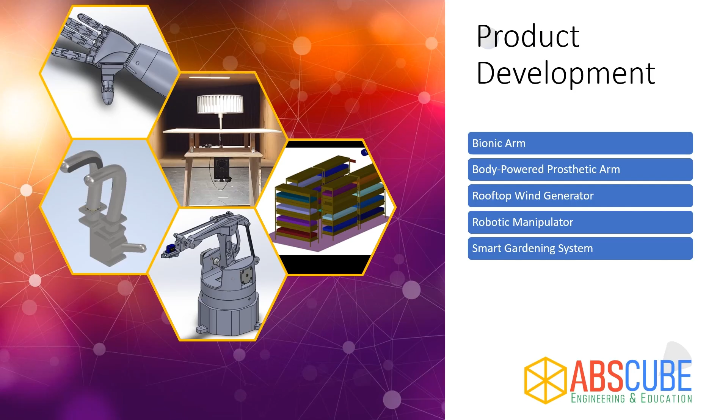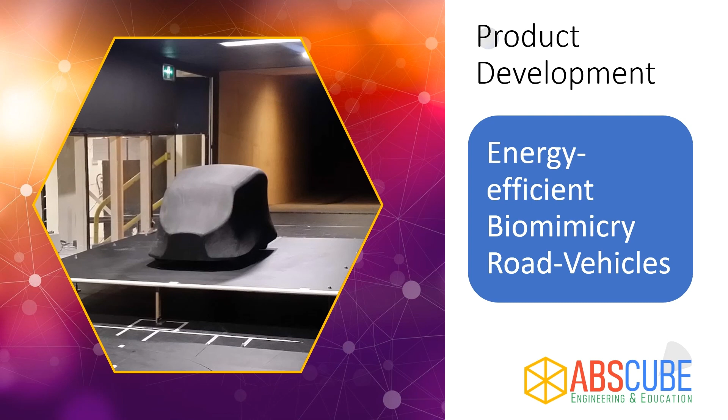Finally, the energy efficient biomimicry road vehicle. Today I'm going to talk about this energy efficient biomimicry road vehicle, a product we are currently developing in progress in our company.

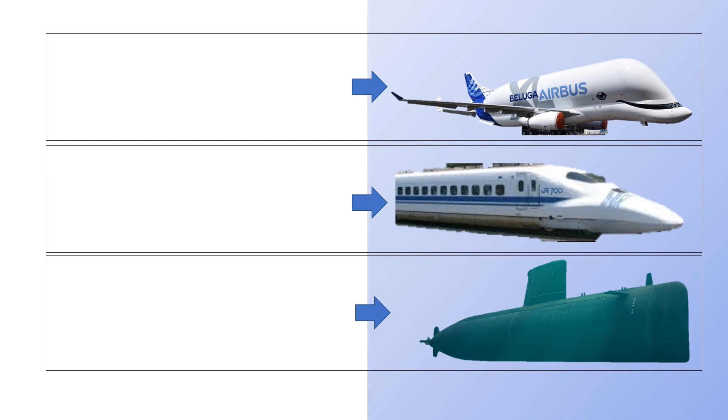Now, what is biomimicry? Here you can see some engineering vehicles: one is an aeroplane, one is a train, and the last one is a submarine, an underwater vehicle. You can see the shape of the airbus was inspired by an animal, the dolphin. Also the beak of the kingfisher is the inspiration for this high-speed bullet train, and the whale is the inspiration for this submarine. You can see the similarities of this engineering design with the design of nature.

So when we copy these things from nature to design engineering applications, that is called mimicking, or biomimicry, in engineering design.

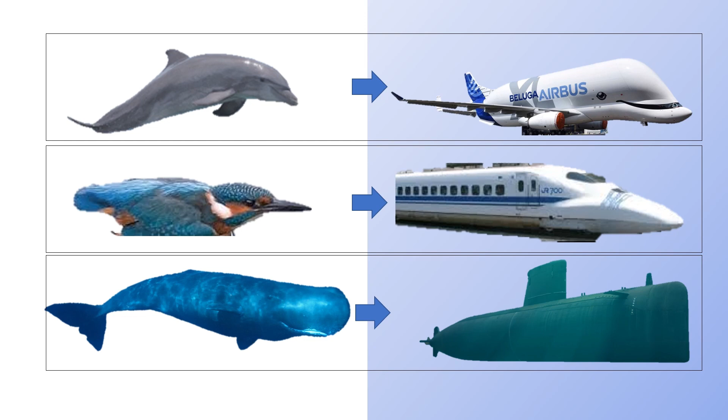Now, what is the methodology? First of all, we need to determine our design objectives. That means what type of design we are going to implement, for example car, bus, or any other objective, any other engineering application.

Once we know our objectives, selection of a suitable biological species, where we need, similar to the previous examples, like a dolphin or any other species like whale. So we need to find out what matches our design objective.

Once we get our inspiration, the biological species, we are going to select that species for detailed study for the parameters. We need to identify what parameters we can implement in our conceptual design.

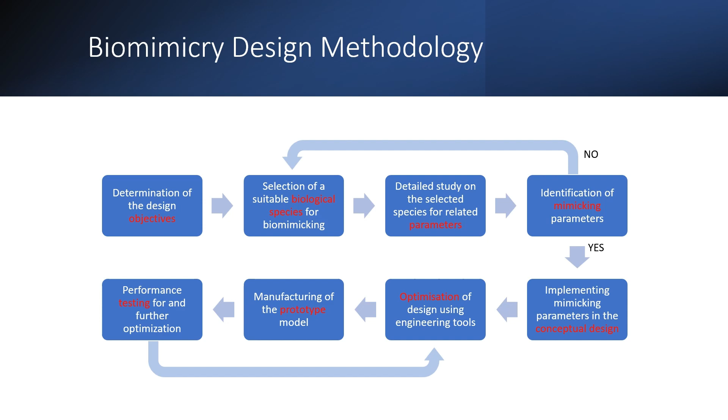Now for this study, the design objective is to design energy efficient road vehicles. There are several types of road vehicles we have selected for this study. We are designing a passenger car and a light truck, biomimicry light truck and biomimicry design for a passenger car.

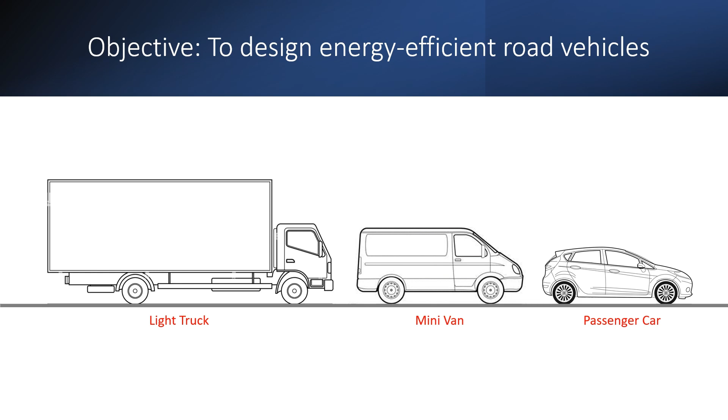Before we go for the biomimicry design, we just need to look back at the evolution of passenger car design. So these are the basic car designs. Initially, when the passenger car was introduced to human civilization in the 1880s.

The second Marcus car, its basic mechanisms are there. There is no aerodynamic fairing, nothing is there. As time passes by, the 1920s model has a shade and a fairing. Then in the 1960s, a more aerodynamic car comes into play, like the Toyota Corolla model.

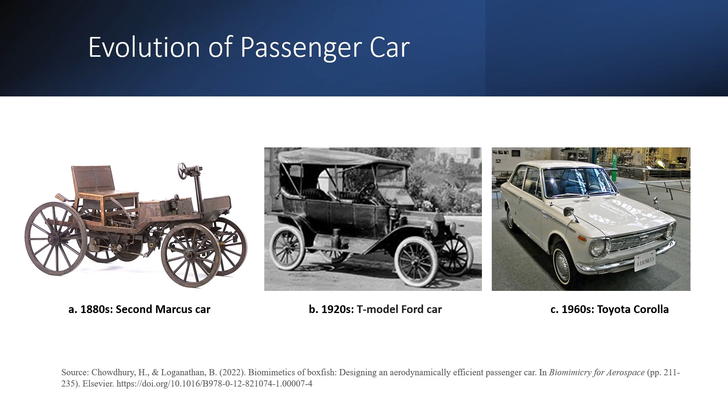We know our objective. Now we are going to select a suitable biomimicry biological species for our biomimicking project. Our objective is to make a passenger car, and we just need to investigate some of the species anywhere in the world and look at the features.

We found that the yellow spotted boxfish is a very suitable biological species for car design, because it has box type shapes and also curvatures, and all other features are really promising for designing a low drag, energy efficient biomimicry car.

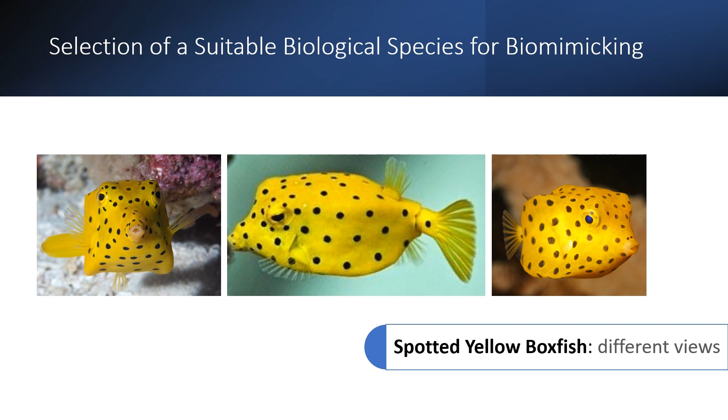Now in this slide, a little bit of a swimming video of a boxfish. Here you can see the size of the fish is very tiny, but you can see in this video clip the different orientation and movement, and how it is moving along and swimming underwater, the features and all other things.

This is a really good selection for designing our passenger car. Now we know our species, and we know what our objective design is, the passenger car. For the conventional design, we are going to redesign the features of the conventional car to make our biological design.

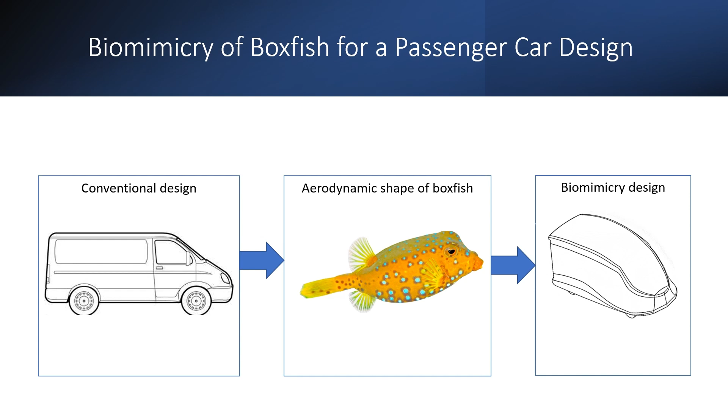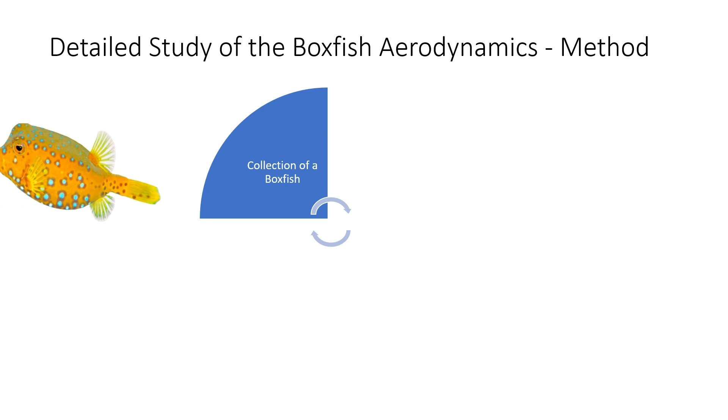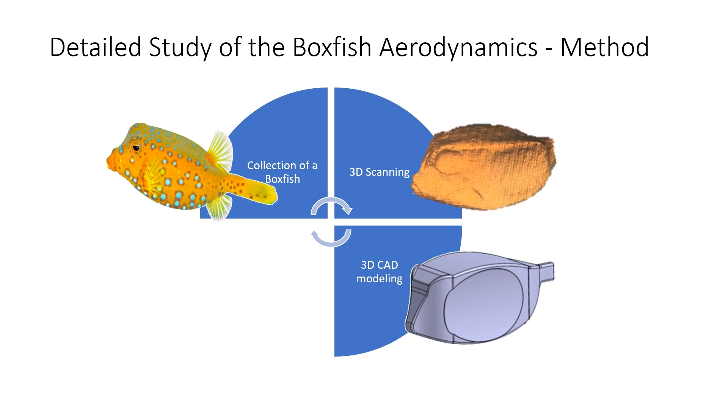Now in this slide, I'm going to show you the methodology applied for this study. First of all, we collected a sample of a live boxfish, then we 3D scanned it to get the exact features, took all the measurements, and made a 3D model of this boxfish for further study.

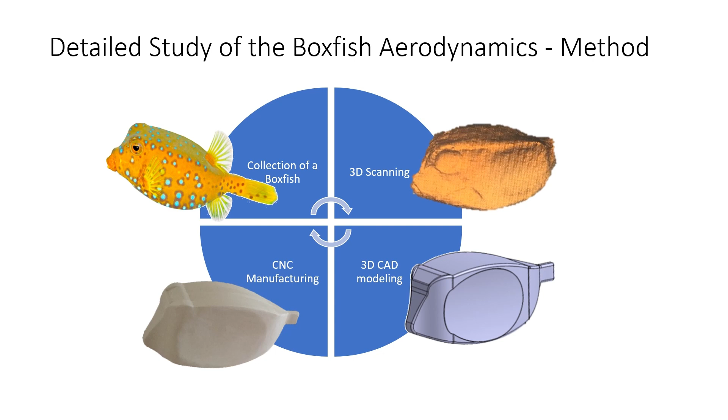Then through CNC manufacturing, we created a quarter model boxfish shape for study. For this study, initially we developed a shaped model, and you can see some of the study related materials.

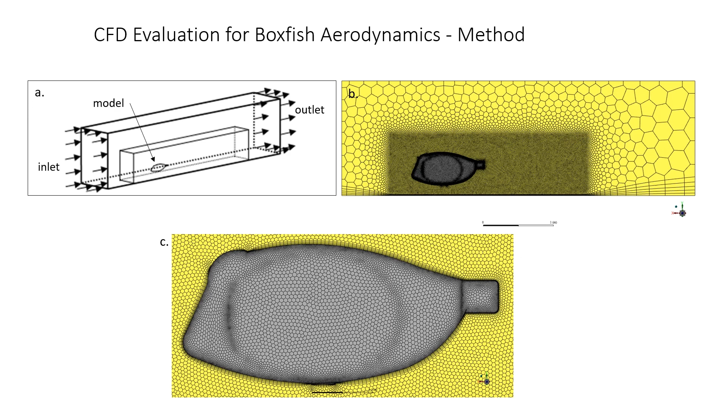We took a mesh, and then we created a model wind tunnel, and we evaluated the performance, drag, and features of this, and you can see some of the evaluation.

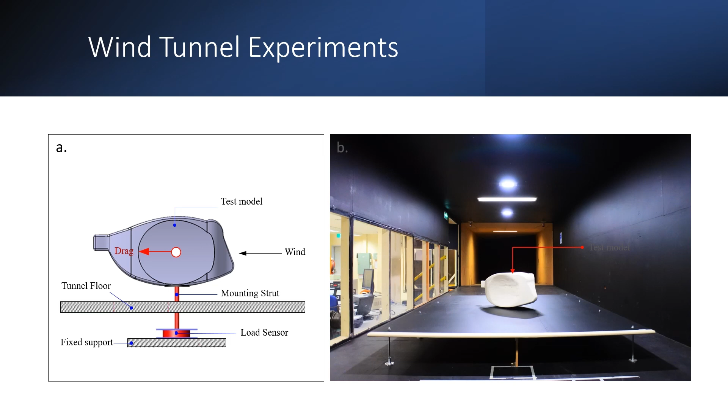The wind tunnel experiment: in this experiment, we used a load sensor to measure the exact amount of drag and lift and all other forces in the wind tunnel. You can see the wind tunnel test section, a type of wind tunnel so we can test a full car inside this wind tunnel.

In this wind tunnel, some of my students were doing this testing at that time. So this is the outside, and now this is the boxfish model.

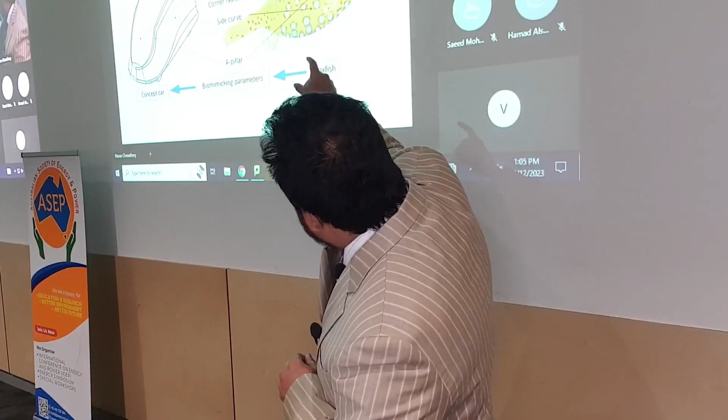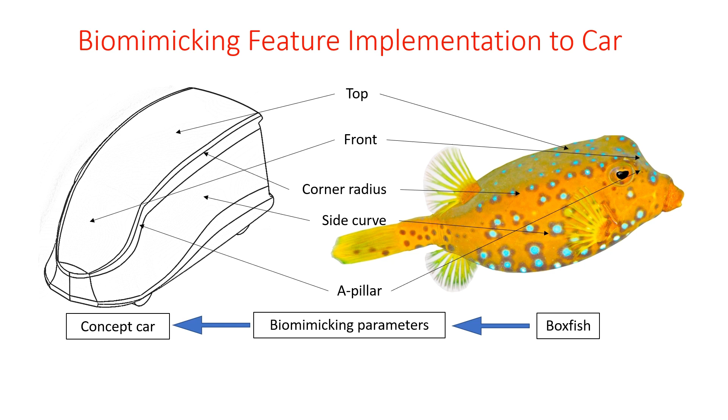From this box fish, this was our inspiration. We take that model and these are the features we use. We're not taking the tail, because if we put a tail in a car, it will be like a funny thing. We saw that the tail has very good advantage, but we cannot put a tail in a car. So this is our inspiration, where we have applied our modeling.

So this is the car we came up with, the iteration, with modeling and all those things. It is not that with a click of a button AI will generate these things. We are human AI, human intelligence was applied to these things. This is the creativity of a human being.

So this is our model, and we developed this model car, and then we go for the optimization. It is not the final version. We optimize these things. This is still a virtual world.

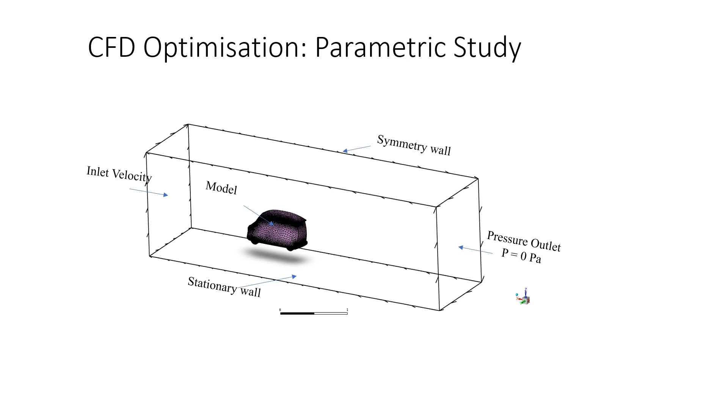And this one, we test it, and if it is not okay, what do we do? We just crash it and throw it and do it again. How many times, you can ask? Maybe hundreds, more than 100 times we have done these things. So it is a time-consuming thing.

And once we've done that, we have to stop somewhere. We just compare, and then okay, stop. We are running out of time, so we go for the next stage.

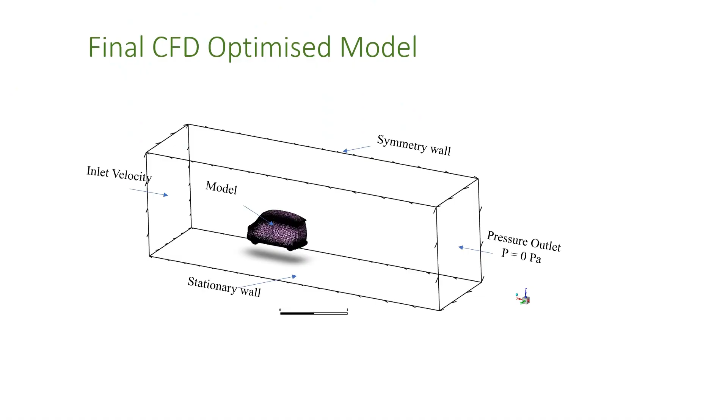So the next stage is fabrication, and this fabrication process is going on here at RMIT, and it is teamwork. It is not that Dr. Harun has done everything, because I run a team, and this team, we work together. This video was created with the RMIT media cell. This is a very slow connection, that's why it's not showing everything nicely, but it's available online.

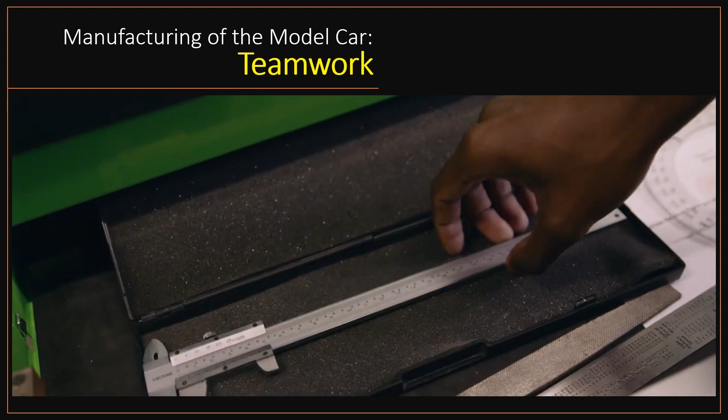So this is teamwork, and we build up our team to make this kind of small model, which even requires a lot of devotion from the students. And that's why I want to inspire the students, because the fish inspired us, and I want to inspire the students so that in the future they can go on with their innovation.

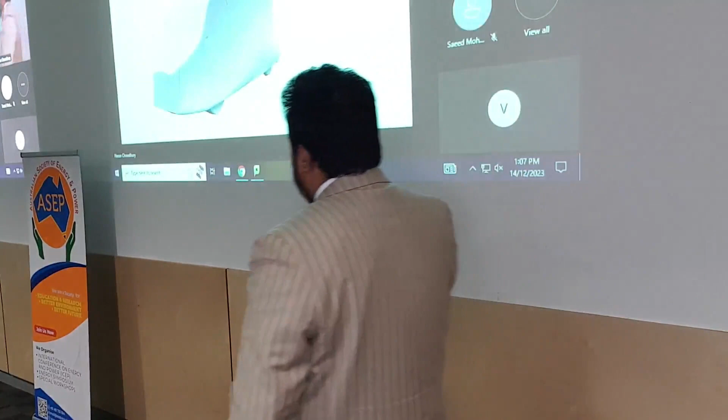Now this is our constructed model, and then after that we painted it. You can see this is the wind tunnel test section, and we are doing the real test. This is a quarter model, so if we multiply it, it's a quarter model, that means it's not that small a size.

We also compared it with our Holden project beforehand. Professor Firoz Alam was doing some tests, and Professor Simon Watkins was doing this kind of research, and we're still using that model, which costs like $50,000, more than a car. This model we use is a detailed model, so we use it for comparison, to see how it compares to our model.

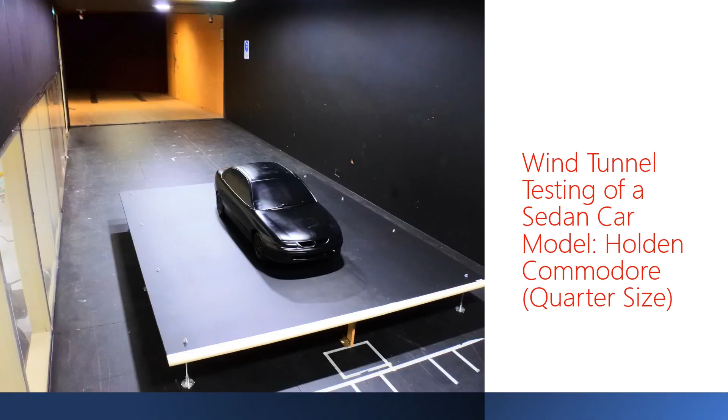So we compared both models, and on top of that, we also modeled a sedan, a hatchback, and a minivan, along with our biomimicry model. The fourth one is our model, and we compared it with these others in a safety comparison as well.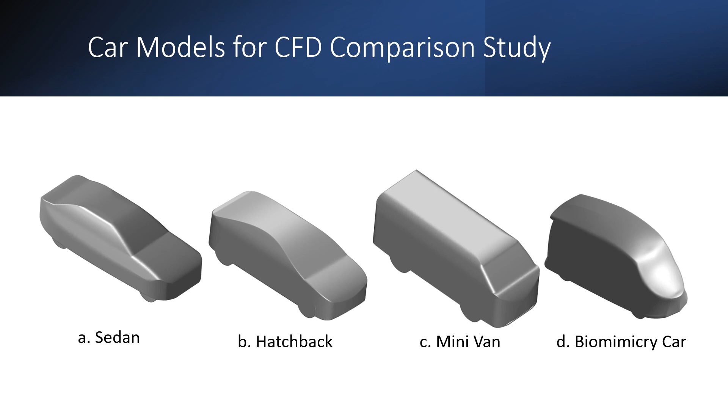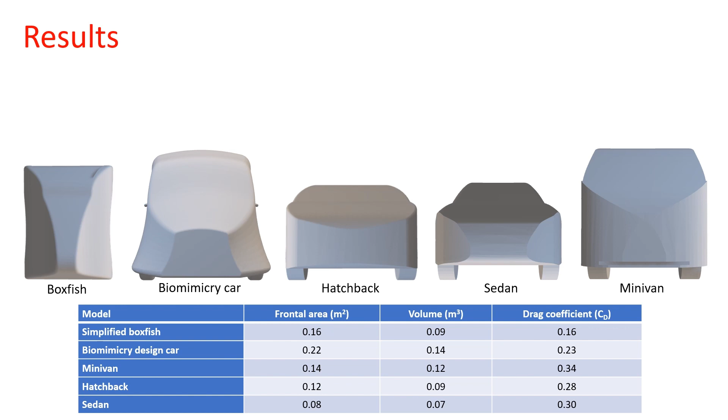So look at that, how does it compare? This is the CFD work, you can see some of it, and without going into detail on the results, I'm going to show you the final version. So what is that? The box fish with the tail gives us a significantly low drag coefficient. Look at that, 0.16.

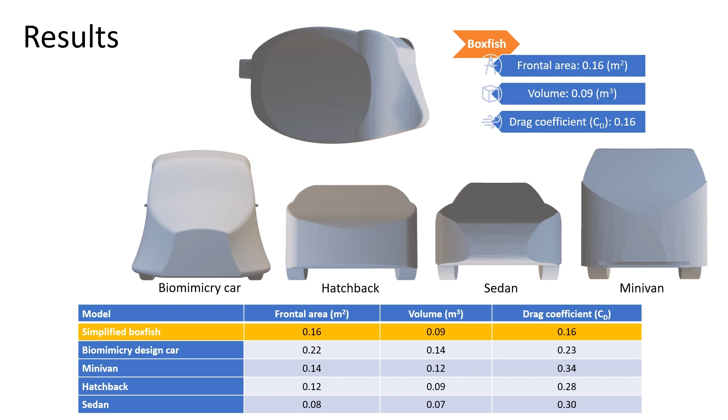Because it has the tail feature, and if we go for the hatchback, this hatchback model has 0.28. So this is compared to that, a little significantly higher.

So this is another model test we've done for comparison, like a sedan, and this sedan one is similar to a Holden Commodore. And this one is a minivan, it's a Toyota model.

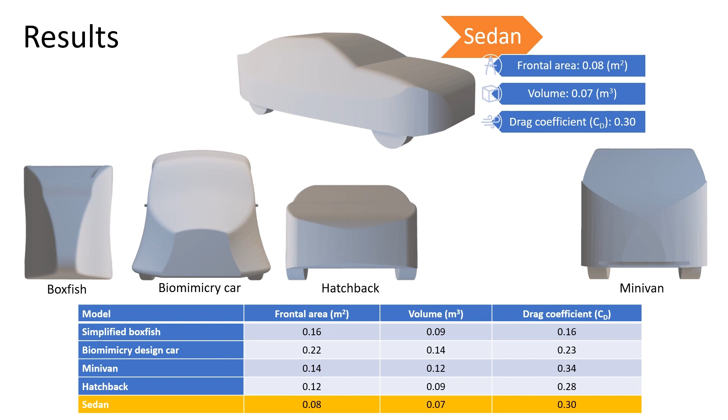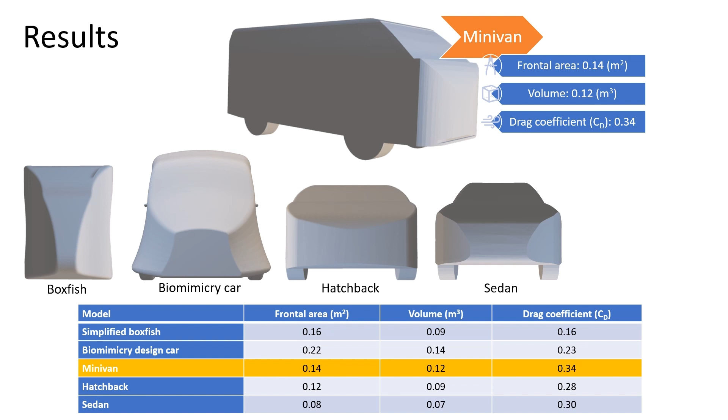So this one, although it is bigger, looks like a box. Go through this one. With this model you can see the frontal area. So we have a few more data, volume, because we are going to compare model to model. So how is it comparing the volume element? You can see the largest volume is for this model, and then this one is 0.14, double the volume of the sedan, and it has 0.23.

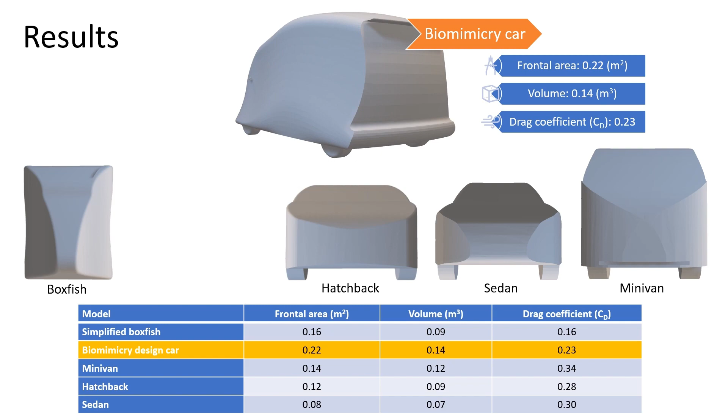So this is because of the feature of the boxfish. So naturally it is coming up. So with this model we are actually happy, and then we applied this to another design, a light truck. This light truck is conventionally designed like that, the conventional design, and we have a model at RMIT University.

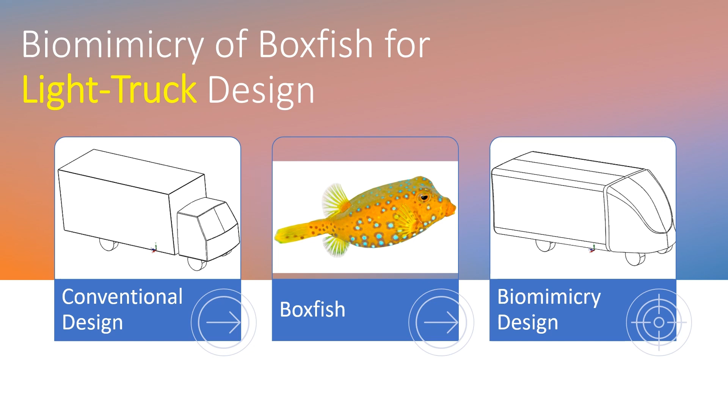And with biomimicry, we came up with this using the principle of biomimicry. You can see the front shape. We changed this to make it more streamlined. So this design goes through the same principles. I'm not going to explain all those results, but you can see some of them here. And this is the model inside the wind tunnel.

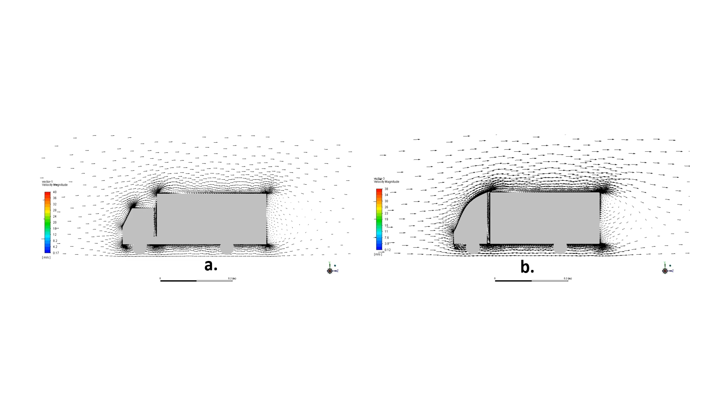What we have come up with is a reduction of the drag: the conventional design has 0.6 drag, whereas our biomimicry design has 0.4. So this is a 30% reduction. Just think about it: drag is fuel. So it's a fuel saving. If you can save this much fuel, it will be a significant achievement for us.

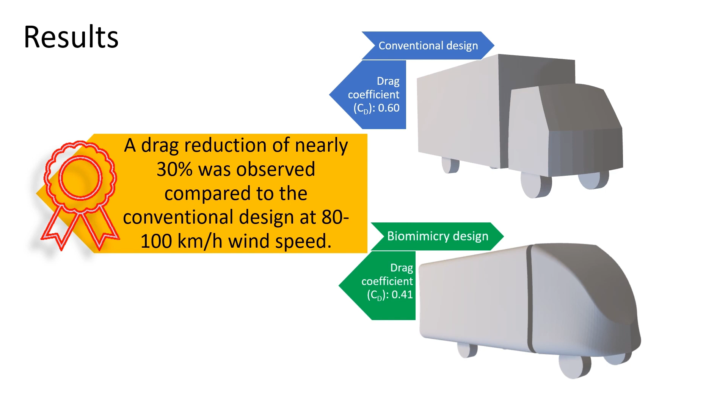Now this is not the full scale. We have not developed this commercial vehicle, so there's a long way to go, but it is a shape we came up with. The conclusion is that our study shows up to 50% drag reduction is actually possible. As I said, any reduction in aerodynamic drag means fuel saving, and it will give us energy saving and security as well.

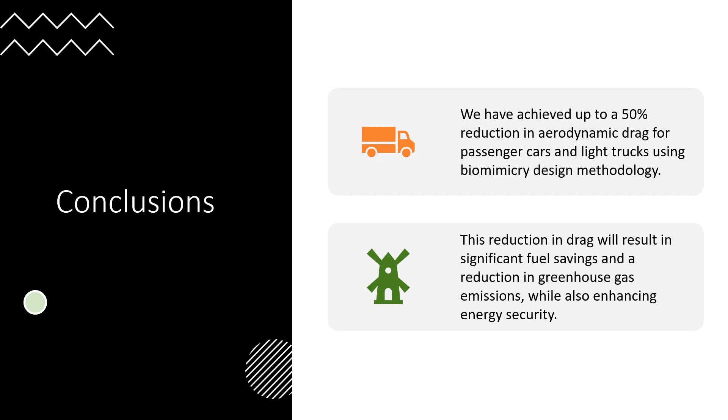So we are coming out with some designs, and we are recruiting interns. They are also taking part in this project, which started in 2016 at RMIT University, and it is still going on. And this is the final version. We are focusing on the full scale shape, and the project is now underway.